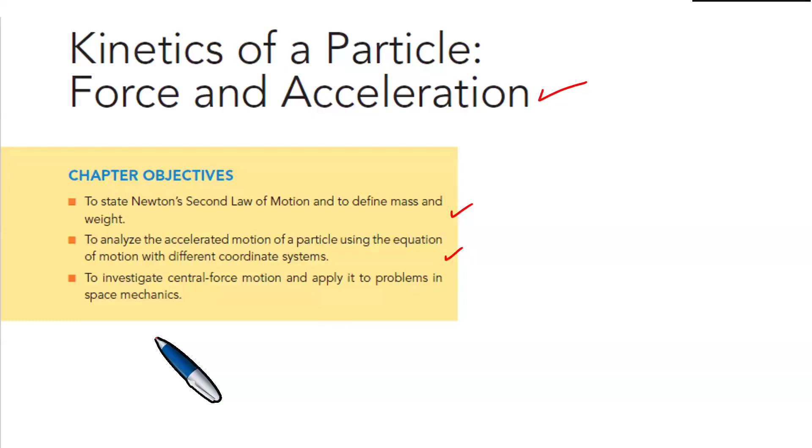Right, we focus on the kinetics of a particle, force and acceleration. Chapter objectives: to state Newton's second law of motion and to define mass and weight, to analyze the accelerated motion of a particle using the equation of motion with different coordinate systems, to investigate central force motion, and apply it to problems in space mechanics. We proceed as follows. Right, I want us to look at this particular situation.

Right, a 50-kilogram crate shown in figure 13-6a, this particular diagram there, rests on a horizontal surface for which the coefficient of kinetic friction is mu k equals 0.3. Okay. Right, if the crate is subjected to a 400 Newton towing force, as shown, determine the velocity of the crate in 3 seconds, starting from rest.

Okay, let's discuss this from the inception of the topic to advanced questions on equilibrium and friction. Right, we have that the coefficient of kinetic friction is mu sub k equals 0.3. Right, and we put it with the 400 Newton force. Now the question we're asking is, we need to determine the velocity. We need to calculate the velocity of the crate in 3 seconds, starting from rest.

So the question is then, what exactly do we do here? And how do we attempt to approach this particular question? Right, so the couple of things that you need to take into account is the notion of the force diagram. So here it's the crate, and if the crate is drawn, let's, as usual in physics, identify the forces that act on the crate.

So now you then need 400, right, minus 0.3 times 290.5. Okay, and we're getting this one. You're getting 259.2615. And then we divide this by 50. And then the acceleration is actually 5.19 meters per second squared. We can write it as 5.185. Good.

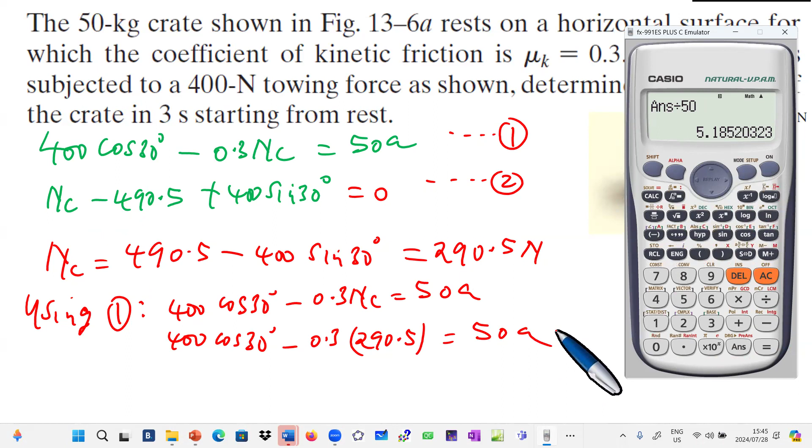So this means that the acceleration is equal to 5.185 meters per second squared. What is the velocity? This plus AT. And then now you have the initial velocity, because this one is from rest: 0 plus the acceleration, 5.185, times the time, which is exactly what? 3 seconds.

And if you compute this, then you're able to get 5.185 times 3, which is actually 15.6 meters per second. 15.6 meters per second. And this gives us exactly what is required. Right. So that's what we have.

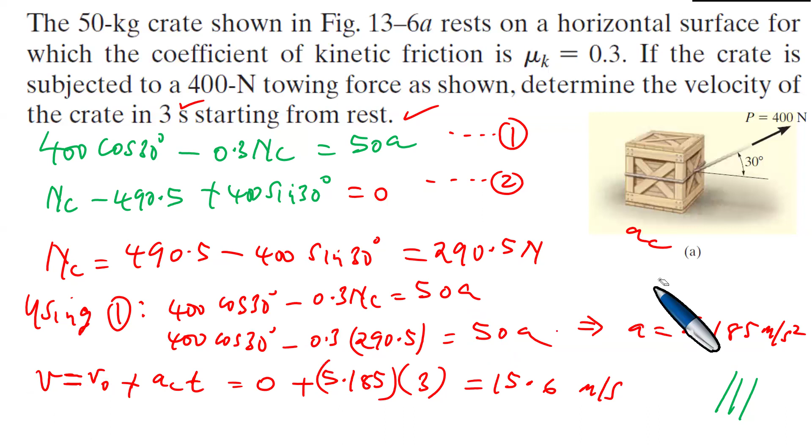So let's check here. Right, so we have this, and therefore this is exactly the result. So now, obviously, we've answered this question. And a couple of things therefore remain very important. If we take into account the crate that we have here, and this is its center, there is a downward force of 490.5 newtons. And this is the normal, which is indeed a constant force.

And you have the frictional force, which is the force of kinetic friction, which is 0.3 NC because it is mu K times normal, with the coefficient of kinetic friction. So now if we have this, what then do we achieve? We're going to have this pulled in that direction. The 400 newton force, and we agree the angle of 30 degrees is there. But in the end, this whole thing is equal to one crate like this.

Everything simplifies to the resultant force giving us 50A, which is the horizontal motion. So this whole crate system moves and accelerates in the direction of the 50A force. This is what Newton's second law says: the summation of all forces in the x direction will be 50A, and that gives us acceleration in the x direction and the actual resultant force in the x direction.

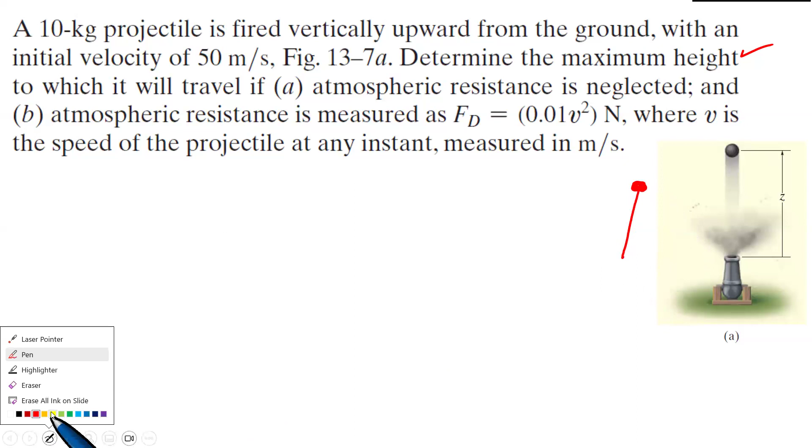Right, so a couple of things you need to take into account. Here is a projectile; you can just draw it as a particle like this. In part A, atmospheric resistance is neglected, so there is no resistance in the atmosphere, and the only force acting on the projectile is its weight.

We know that the weight is mg, which means the mass, exactly 10 kilograms, times 9.8. You can put 9.81 if you wish, or just 9.8. And if it's 9.81 that you take, the decimal point moves once, making it exactly 98.1 newtons.

So that is what we then are able to get here. This is the only force that is going to be acting, but the acceleration, because this thing is moving up, is going to be straight up in the z direction. And we agree, therefore, that the acceleration is going to be straight up because it's moving upwards.

Now, what then is all this here? What is the meaning of all this? Because in the first case, we're dealing with A, atmospheric resistance is neglected. Okay. So our solution is going to be written like this. The weight is mg, and the mass is 10. The mass is 10 kilograms multiplied by 9.81, which is actually 98.1 newtons of weight.

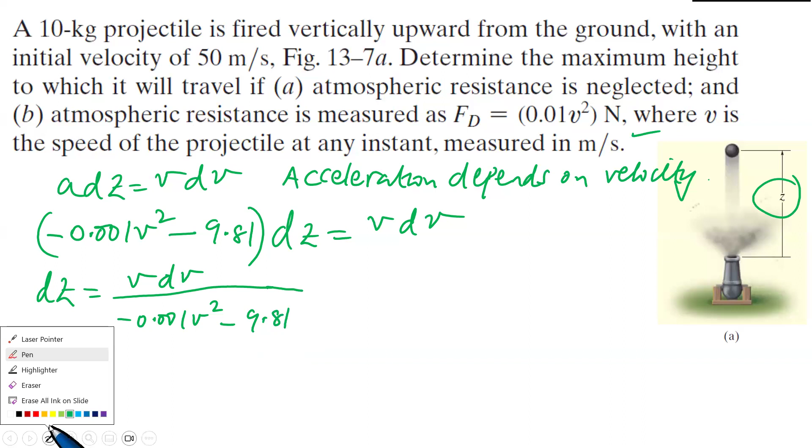then we compute the integral from 0 to h, where h becomes the maximum height. We have the integral of v dv divided by minus 0.001 v squared minus 9.81, like this. So what have we done? We want to get the maximum height, and therefore we're taking the integral of both sides.

This is exactly dv, but this dv now has a v on top. And we then have the integral from 0 to h of dz. Okay, now this integral here, from the previous question, we understand. Right.

Right, we actually need to take note of the following. Remember that it is fired vertically upward from the ground with an initial velocity of 50 meters per second. Okay, so if this is the case, it's going to have an initial velocity of 50 meters per second, but at the maximum height, it's going to have zero velocity. It was projected initially at 50 meters per second, and then at the maximum height, it's going to stop.

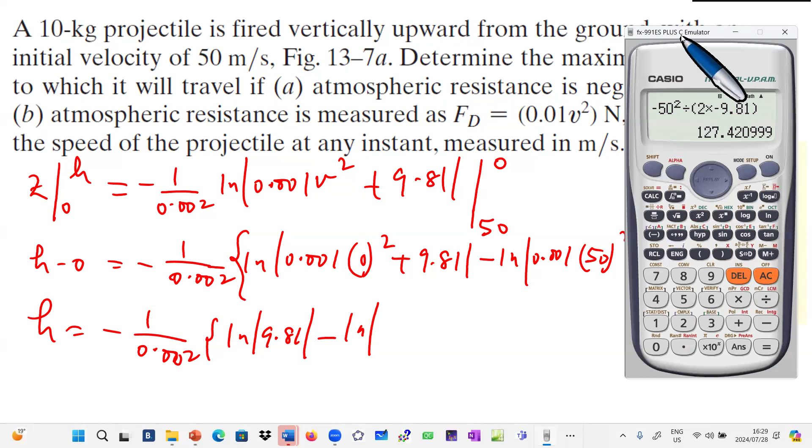Okay, so, all right. Right, so 0.001, 50 squared, 9.81. Which is actually 12.31. So here you're going to have the natural log of 12.31 because it's 0.001 and the 50 squared plus 9.81, and you take the absolute value of that. It is actually exactly 12.31, like so.

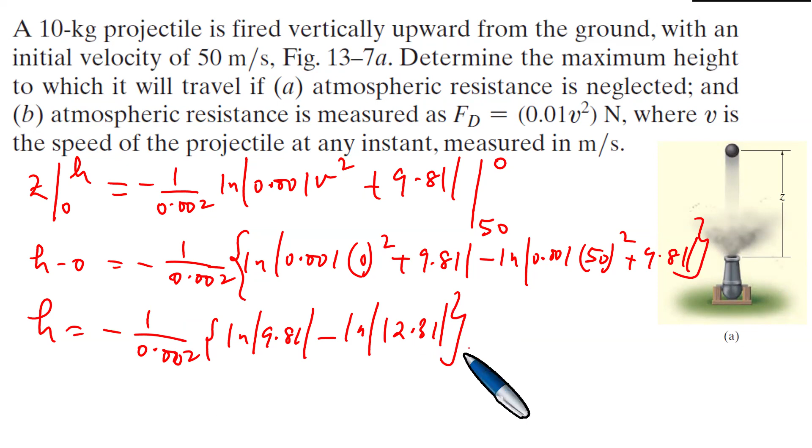Okay. And what then are we able to get? It's minus 1 divided by 0.002. We have the natural log of the following. So you have 9.81. You divide everything by 12.31, like this. And if you use a calculator, you'll be able to achieve exactly the height we need. What is the maximum height reached in the presence of drag, in the presence of what we call atmospheric resistance. Right, so I want us to punch this on the calculator.

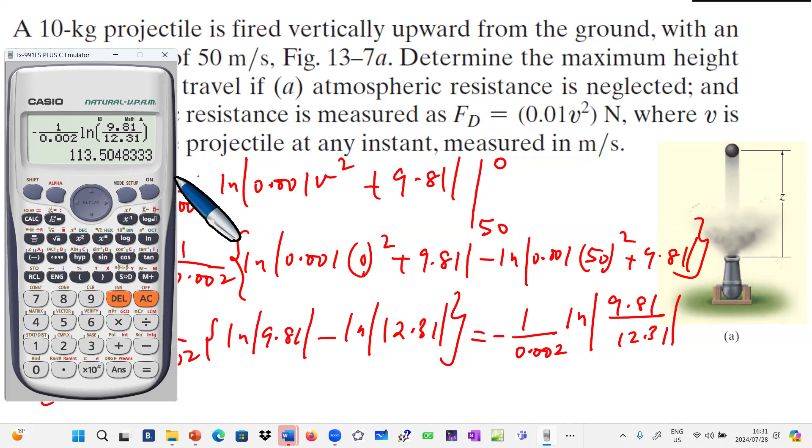So I'm going to punch this negative, and then I'm going to punch this particular fraction 1 over 0.002. Right, and you punch the natural log. Then you go to this one here, which is exactly 9.81. You divide everything by 12.31. And you close like this. And what is the answer? It is 113 point that. It's just about 114. What an awesome answer. So now it means that 114 meters.

Let's look at this. In the previous calculation, we agreed that here's the projectile and it's being fired vertically upwards, but it is reaching a maximum height of 114 when we have atmospheric resistance. We saw earlier on that in the absence of air resistance, it was able to reach a maximum height of 127 meters. So we saw that it was h equals 127 meters when there was no resistance, and h is 114 meters with resistance.

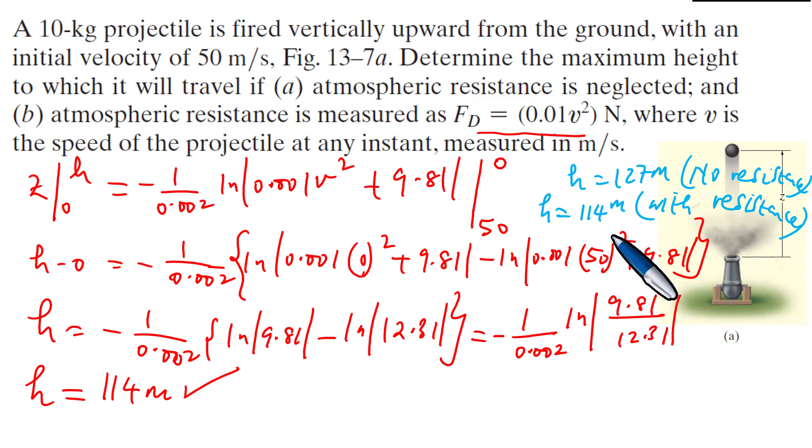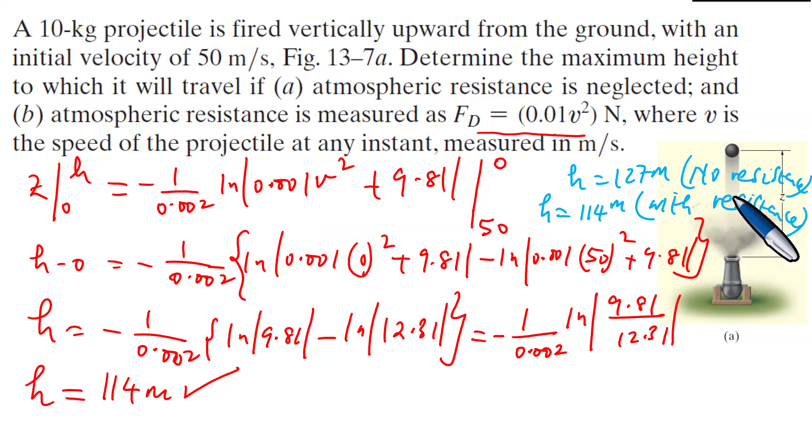So what then is the position here? Resistance is slowing down and reduces the height because it's only 114 meters. If there is air pressure and atmospheric resistance, then the ball does not go so high. But if you remove the wind and you remove atmospheric resistance, we can see that this object will go very, very high. We continue as follows.

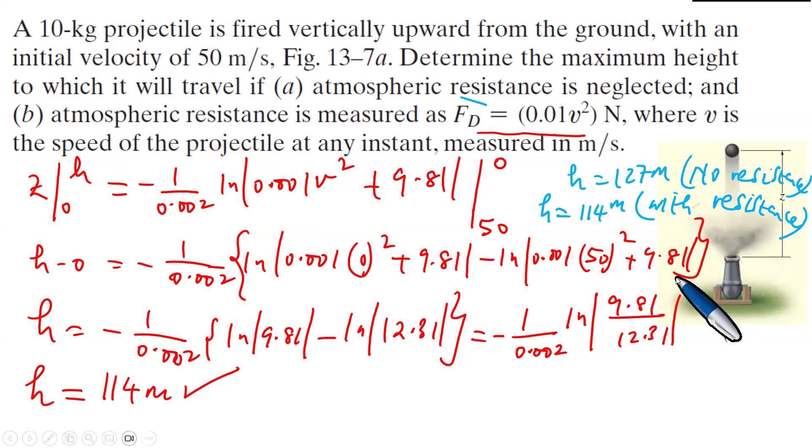Okay, I want us to look at what happens in the trucks. There's a truck here, in this section we're studying on normal forces and friction. The baggage truck A, shown in the photo, has a weight of 900 pounds. And tows a 550-pound cart B. There's cart B of weight 550 pounds. And a 325-pound cart C. There's another cart that is being towed.

So this baggage truck is dragging two carts, right? It's dragging two trailers. In the South African language, you could call this a trailer, or a caravan. So it's like dragging a caravan. For a short time, the driving friction force developed at the wheels of the truck is FA equals 40t pounds.

Right, we know the friction force, and you can just write it here, Mr. Examiner, is 40t. And this is actually the force, in pounds, where t is in seconds. If the truck starts from rest, there is the truck and it's dragging the two carts. Cart B is one of the carts, and then there's cart C as well. Determine its speed in 2 seconds.

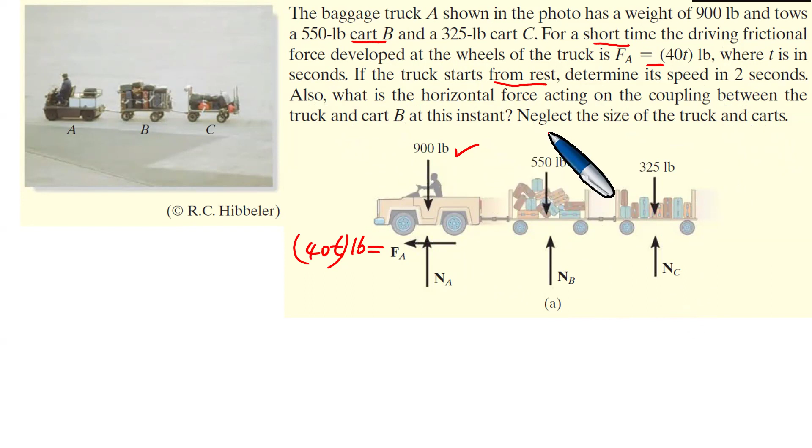Also, what is the horizontal force acting on the coupling between the truck and cart B at this instant? Neglect the size of the truck and the carts. Okay, let us look at what is happening here. When we start these kinds of questions, we look at them in one direction only. And we focus on the equation of motion.

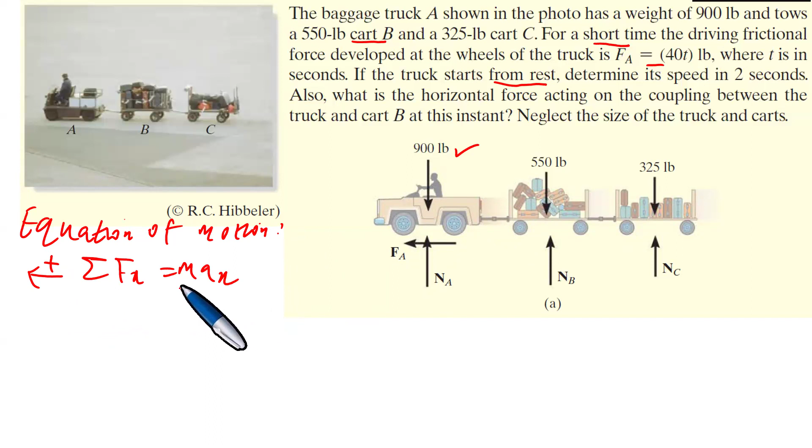What is the equation of motion? When this baggage truck is pulling everything, we take the original direction as positive, so that the summation of Fx is equal to max. Like this. So that in the end, we would get the following. So FA is therefore 40t, which is actually the force, FA.

And it is equal to what? We're interested in the actual mass. What is the mass of this here? Right. So what is the mass of this? We know very well that at this point, we have the following. 900

is actually the associated weight of this, plus exactly 550, plus 325, and this is all divided by what? It is divided by 32.2. Okay? And it is multiplied by the acceleration A.

Let us take a look at these, because you have the 900 pounds, the 550 pounds, the 325 pounds. And the 325 pounds is exactly what you then have here. So in the end, you are attempting to say, what would the overall mass of this system be if we regard it as one overall system? So we add all these particular weights, the 900, the 550, and the 325, we add them all up.

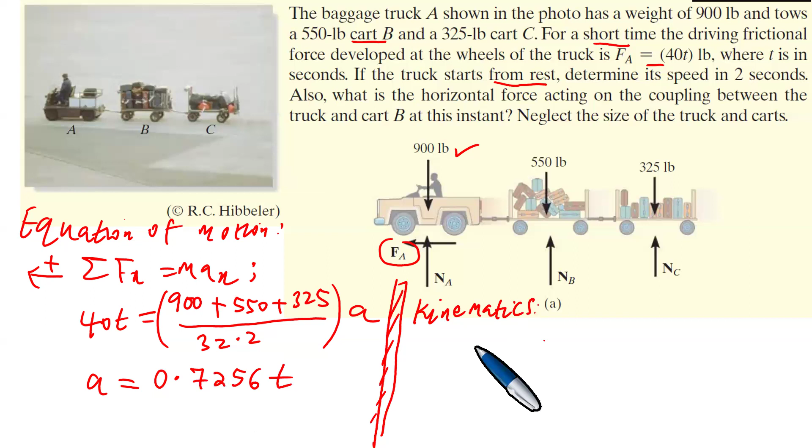So the kinematics is going to be coming from this guy. What exactly is this guy? Kinematics is going to emerge from the fact that acceleration itself is 0.7256 t, which means that we have dv/dt, which is 0.7256 t, which means that dv is 0.7256 t dt from the previous calculation.

What do we actually want to achieve in this particular question? If the truck starts from rest, determine its speed in 2 seconds. So you want to find the speed in 2 seconds. Right. So what is the speed in the 2 seconds? So we have this one, 0 to v. And then in the 2 seconds, the time here is from 0 to 2.

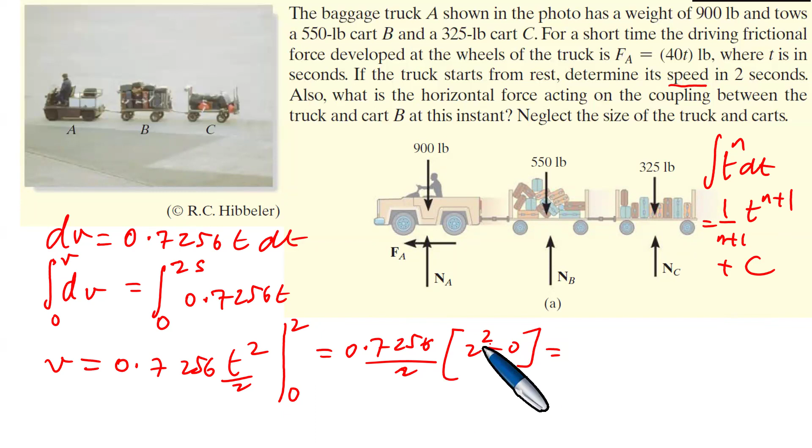Okay, let's compute, which is 0.7256 over 2, times 2 squared minus 0. If 2 squared divided by 2, it's 2 times this: 0.7256.

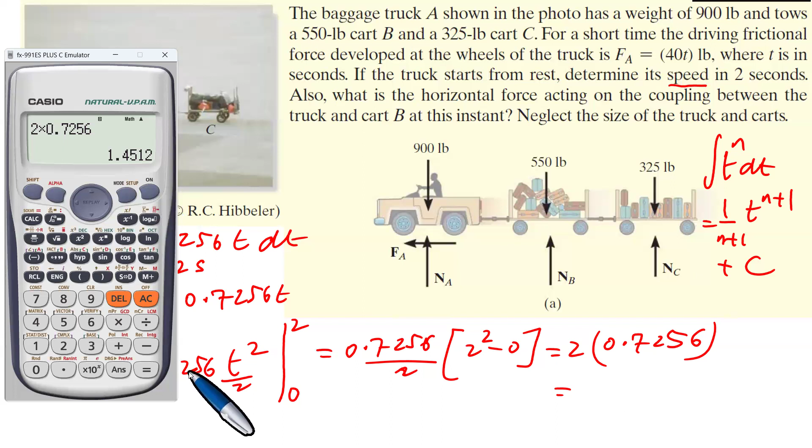So 2 times this. 2 times this. Okay, let us check. Can use the computer here, the calculator. Right, use the calculator to actually compute the actual speed that is required. So the speed is going to be 2 times 0.7256, and we get the answer. It is 1.45 feet per second, which is 1.45. So it's 1.45

feet per second. Okay, this is a problem that would be mostly for the British, because the British are the ones who are using what? Right, are the ones who are using the pound as a unit of force. Are the ones who are using the pound as a unit of what? As a unit of force. But now, obviously, we use the Newton in South Africa, but some people in other countries use other units like the pound, the LB. Okay, now let's continue.

But what was the question? Just to make sure we've answered it. If the truck starts from rest, determine its speed in 2 seconds. Also, what is the horizontal force acting on the coupling between the truck and cart B? Here is the truck, and there is the trailer that the truck is dragging. What is the horizontal force acting on the coupling between the two at this instant? Neglect the size of the truck and the carts.

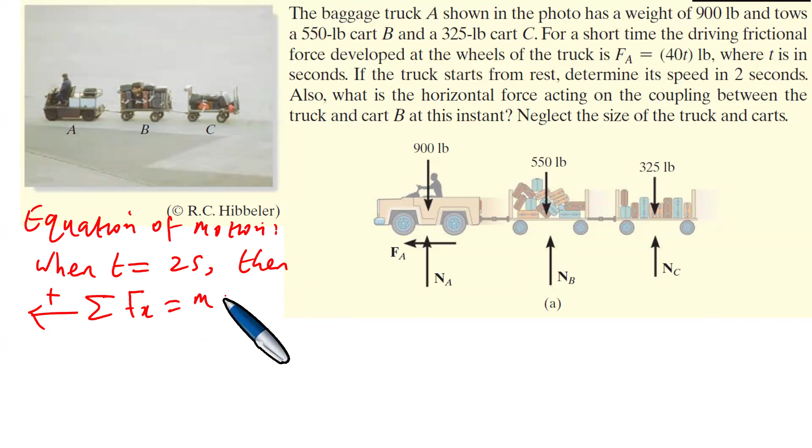Okay. Equation of motion when t equals 2 seconds. Then the summation in that direction is the summation of Fx, which is max, which means you have 40 times 2 minus tension. Okay, let's deal with this. So the equation of motion now when t equals 2 seconds, because of the speed in 2 seconds, we want to get the actual coupling force there. So we want to get the tension.

But what happens in this case is that this horizontal coupling force is a force in the x direction, right? The vertical is the y and the horizontal is the x in what we call the Argand diagram, or the Cartesian plane. So we agree that at this point, the force on the horizontal is going to be 40 times 2. Let me write a little bit more here.

So in principle, the forces in the horizontal are going to be Fa minus the tension, and this is the same as max. What is Fa? Right, our Fa is 40t, which means you have 40 times 2 seconds minus the tension. Remember, when the truck is pulling in that direction, the tension is the other way. These two are in opposite directions, wrestling with each other. The trailer is pulling the truck to the back while the truck is pulling the two carts from the back.

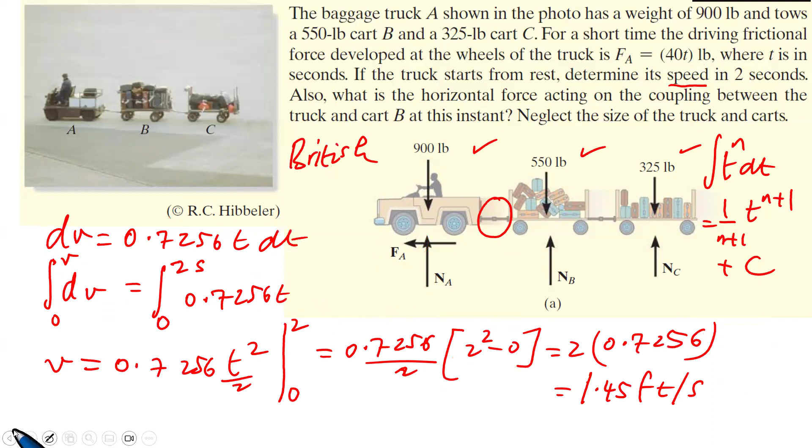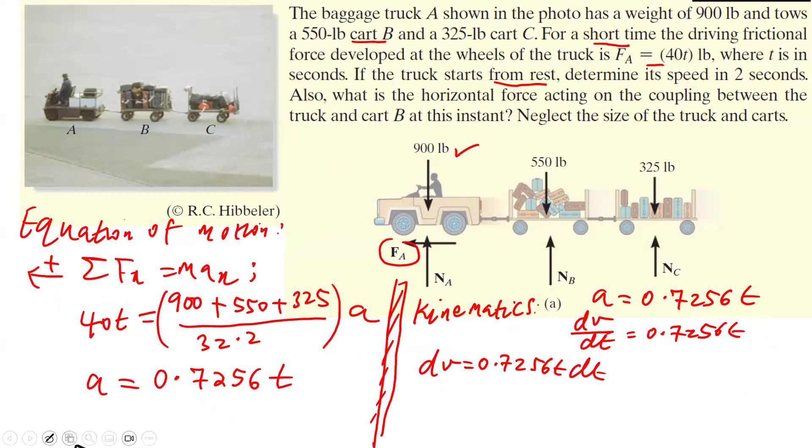The weight of the truck is 900 pounds divided by what? Right, divided by 32.2. And we multiply this by the acceleration in the x direction. What is the acceleration in the x direction? We saw before that the acceleration in the x direction is 0.7256 t, and t is 2, like this.

Okay, so what is the tension? Use a calculator. You multiply this, take the T to the other side and subtract with the calculator, and you're going to get the tension is 39.4 pounds. There's the unit of force. Right.

So it's something that you need to take into account and make sure you understand, and make sure that everything is okay, and now you are able to understand everything very well. So take note of that, and make sure that you are able to understand every single bit of what we're doing.

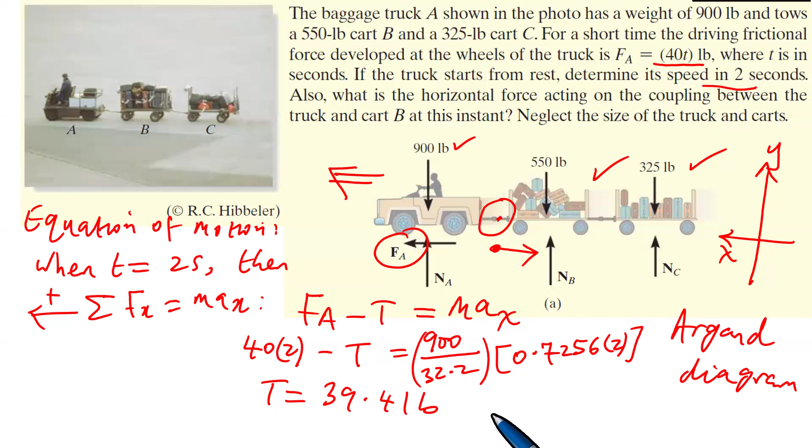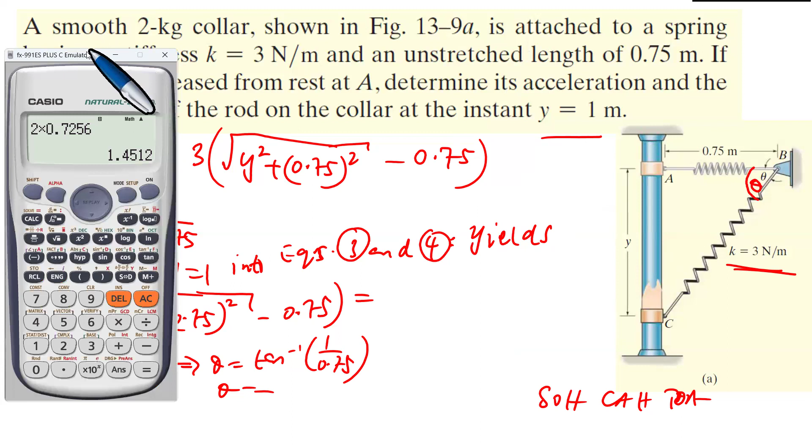So, right. Right, so now you have 3 times the square root of 1 plus 0.75 squared minus 0.75. Okay, which is like 1.5, 3 over 2. Right, so I have just done the spring force.

Right, so now, okay, I'm gonna release you. I'm gonna take a break.

Right, so which is actually 3 over 2, which is 1.5. The spring force is 1.5 newtons. So now, what are we able to achieve here? Okay, we can even get the angle theta. What is the angle theta? Okay, let's use the calculator quickly.

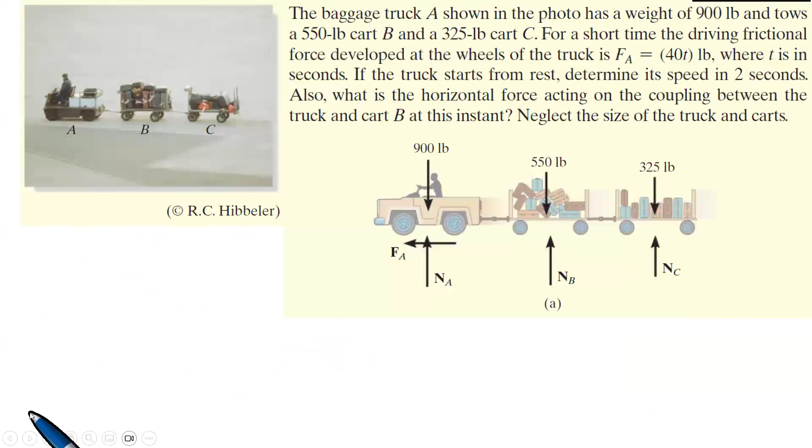I'm releasing you, please, I know. I'm running out of time.

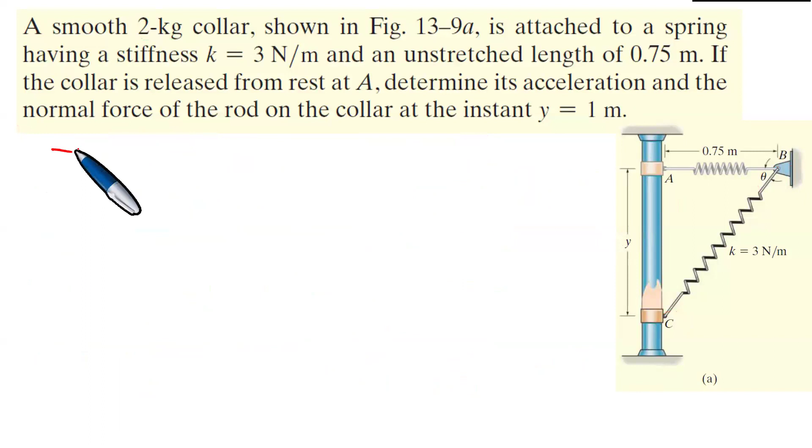Minus NC plus Fs cosine theta equals 0. Okay, so NC is equal to Fs cosine theta. And what is Fs? The spring force, 1.50. So 1.50 cosine of 53.1 degrees. Okay, use the calculator, because we need to find the normal force from one of the equations, and the acceleration.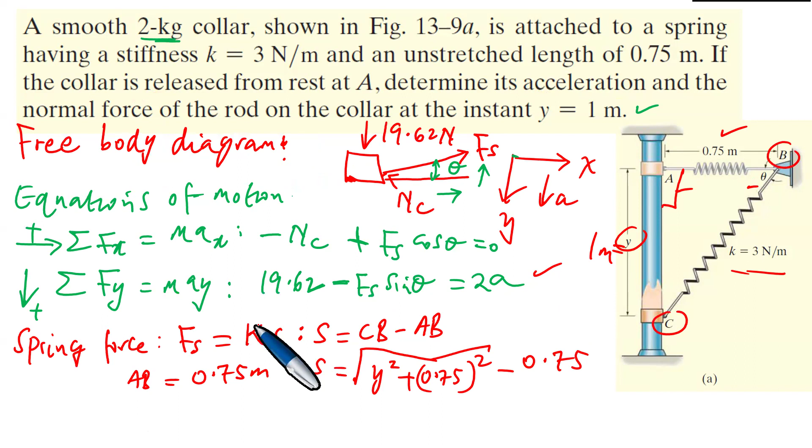The acceleration is going to come from this equation, because this equation has acceleration. We just put in the spring force and the 19.62. So 19.62 minus Fs sine theta equals 2a. The spring force is 1.5, and the angle theta is 53.1. We need the acceleration, so we just divide by 2 and get the acceleration.

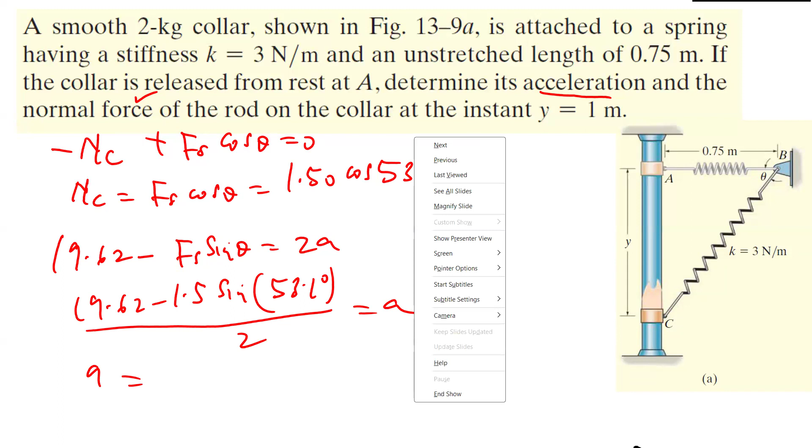Yay. Okay, we're finishing. And then I'm going to release you so that you can go to the church and do your things, which is good.

Okay, I'm going to do the normal force. Just want to confirm these answers. 1.5 times the cosine of 53.1, which is 0.900. That is the normal force, in newtons. And then the acceleration, let's find it.

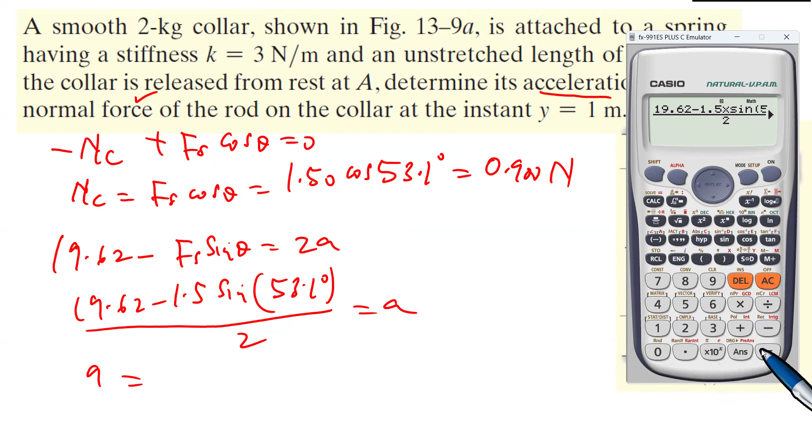Which is 19.62 minus 1.5 times the sine of 53.1, divided by 2, which is 9.21 meters per second squared. Okay. So we found the acceleration and we also found the normal force.